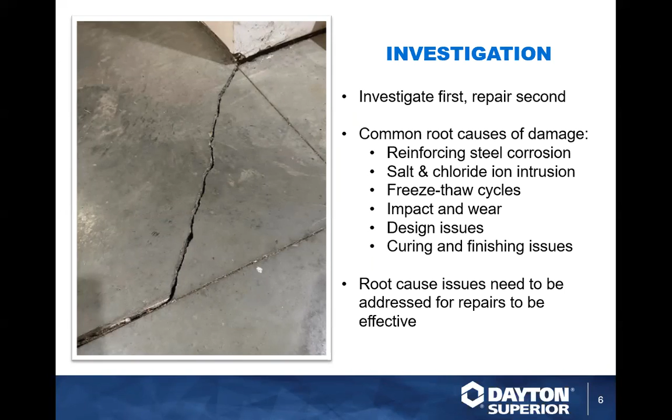But in any case, if the root cause of the damage is not addressed, the repairs are not going to be effective in the long term. So it's really important to have a full scale understanding of the problem so that you can address it in its totality. Repair mortars are specifically designed cementitious materials or epoxy based materials that are engineered for a purpose.

Some repair mortars are meant to take traffic. Some repair mortars are meant to be installed vertically and overhead. Some of them could be built up to 12 inches thick when they're extended with aggregate. Some of them are thin setting, ½ inch or less. They're all specifically engineered products, and picking out the right repair mortar for your job, outside of addressing the root cause and going through the steps of installing it correctly, is very key to having a successful repair job.

So basically, when you get into a repair job, make sure you're picking out the right material for it. Go through the tech data sheet, look at its limitations, look at its features, and you go from there. It's pretty easy to figure out what you're going to need for a job, given depth parameters, given the substrate, given the conditions. But measure twice, cut once. Material selection is very important in the world of repair mortars.

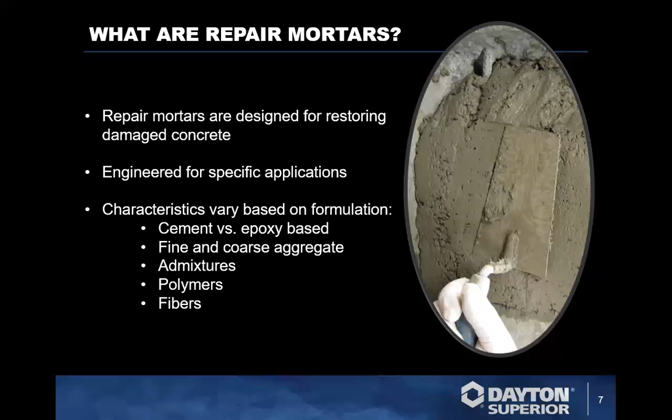Where is it going to be going? Is it going down flat? Is it going overhead? Does it need to be formed up and poured or pumped? These are the defining characteristics of repair mortars.

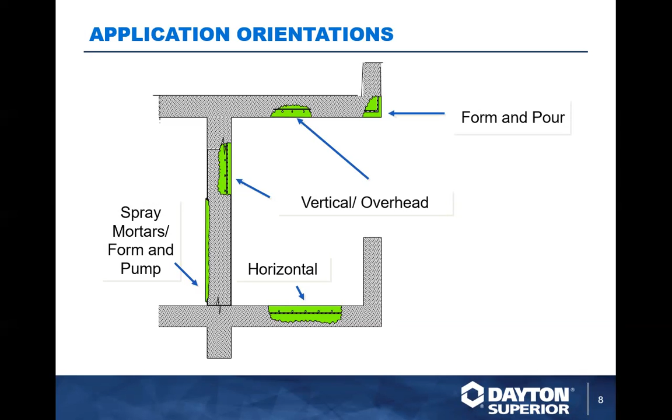So after we've addressed the initial cause of the damage, and we've started to figure out what kind of material we're going to need to use to repair it, we need to define the entire repair area. This stuff is all very spelled out in ACI documentation about how you need to lay out repairs so that the mortars stick and adhere and wear correctly. Basically, you're going to see damage at a certain spot and start there, but working out from the core of the damage using sounding techniques such as hammer sounding, impact echo and chain dragging is a great way to understand the whole repair.

How much material are we going to need? How much of this area are we going to need to caution tape off or danger tape off? How long is this going to take? How big of a crew are we going to need? You don't really know that until you start sounding out the area and preparing the area for repair. But audio techniques, hammer sounding, chain dragging, and these newfangled impact echo machines do a really good job of getting into the concrete, helping you figure out how far you need to get out from the middle of the damage with your repair.

And tell me the truth. Did you make up chain dragging? It sounds like something. It does. It sounds like a myth, but actually it's very common, especially on bridges. Okay. It's a common means to. I just thought maybe you want to be in the back, running around with the chains or something. Yeah, I mean, it sounds like fun, but it's really not. It's just noisy and heavy.

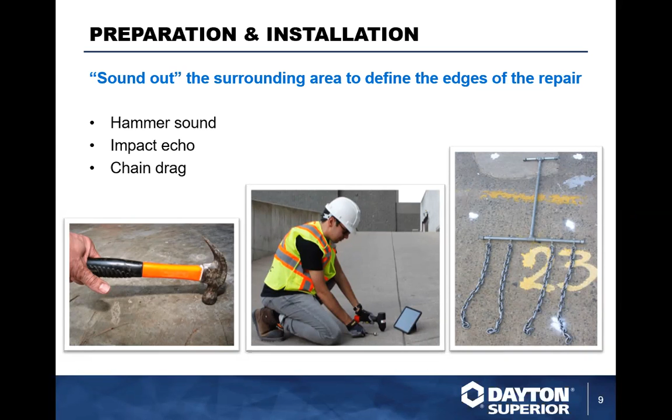Repair geometry is actually really important too. I think a lot of people who work in the field are just kind of used to doing things this way and don't really understand why. But having a defined edge to the repair using square or rectangular geometry is widely recognized best practice.

Using a saw or a grinding wheel to create these edges basically gives the repair mortar something to bind to. It creates a uniformity. It makes it easier to place. This is just how you should be laying out your repairs. Odd angles and strange patterns just tend to crack and delaminate.

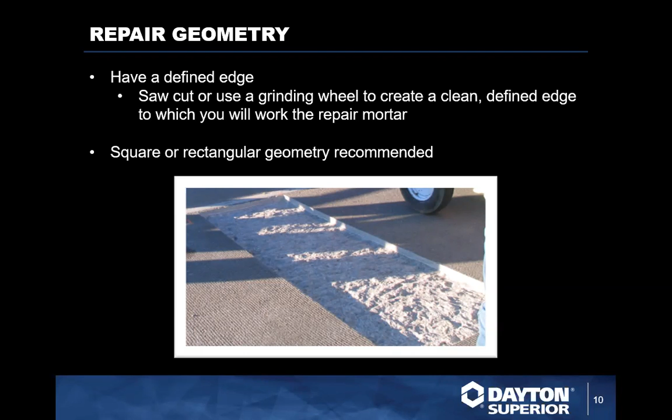And additionally, if you aren't going about square or rectangular geometry and sounding out the repair and going through these initial steps, a lot of times you can be using damaged concrete as your substrate. So this helps you make sure that the entire area you're repairing is uniform and that you aren't bonding repair mortar to any structurally unsound concrete, essentially. It's kind of a fail-safe mechanism.

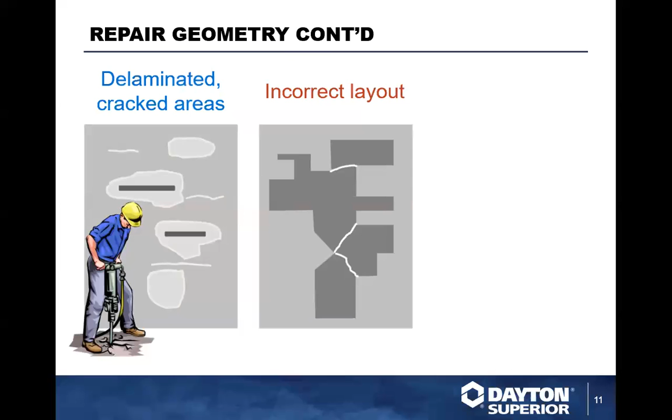This picture kind of spells it all out too. You have cracked areas and delaminated areas, and it's just not looking good in several areas. You could lay this out like the picture in the middle here, and it might seem like it's going to do a good job. You covered all the repair areas. But that's really not how you should be doing it. Squares, rectangles, it's easier to saw cut, it's easier to place, it's easier to work with, and it also helps you make sure that you aren't applying the material to anything that's structurally unsound.

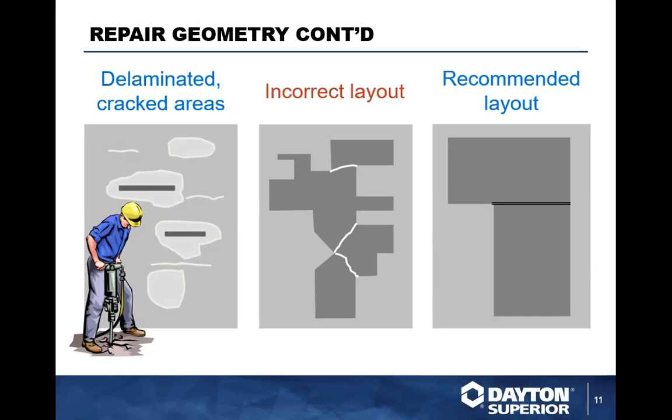First off, we got to clean the concrete. After we've saw cut all these edges and we got our geometry all set and good, get the dust out of there. Concrete, when you cut it out, creates dust. When you chip it, it creates dust. If you're hammer drilling, if you're jackhammering, too much dust. We don't want the dust on the surface. Clean the concrete. Oil, any kind of bond breakers, you don't want standing water in there. We'll talk about saturated surface dry in just a minute.

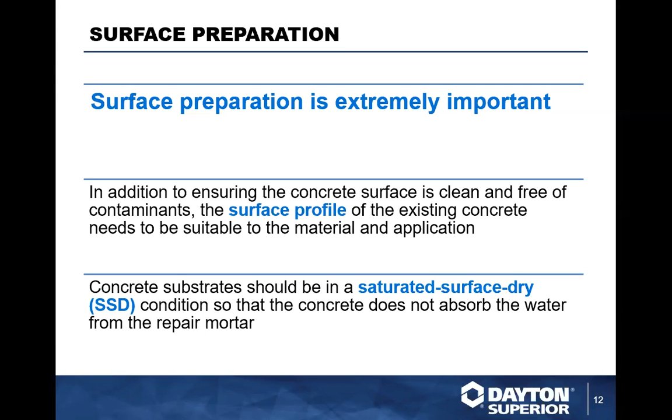But these conditions are extremely important, and if they're not really well attended to, you're going to have failure in your repair material, and you're going to be back there doing the same job twice. Most people who listen to concrete construction webinars don't like doing the same work twice, so highly recommended. Focus on the details before you start placing the material, and you'll love life. It'll be good.

Without this profile, the repair mortar cannot bite in. It does not bond well. Concrete does not bond well to really smooth surfaces, in layman's terms. Most of the time in your technical data sheets, there will be a recommendation on concrete surface profile.

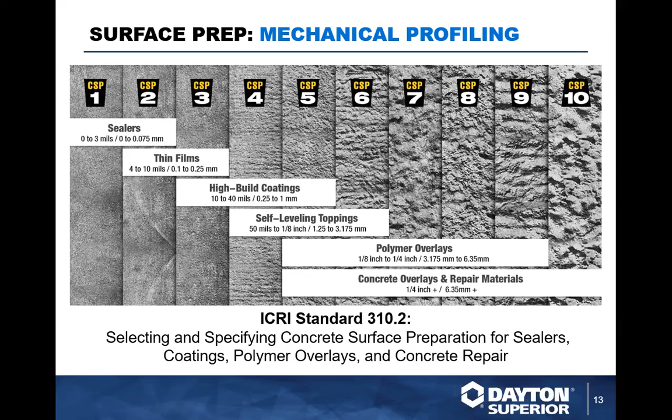Saturated surface dry is a condition of a porous solid where the permeable voids are filled with water and there's no water sitting on the surface. Basically, this is mumbo jumbo and big words for concrete sucks water. It's true though. If you have a concrete driveway and it's not sealed, go out and dump a bucket of water on it. It'll soak the water right up. There will be no water on the surface anymore.

When you mix up a repair mortar, it has water in it. So what concrete wants to do is suck the water out of the repair mortar mix and deprive the repair mortar of water, which is bad for the strength of the repair mortar. It robs the cement of its hydration. It doesn't cure properly. It chips out, it breaks, it cracks, common issues.

So the saturated surface dry process, basically, think about thirsty concrete. You give the concrete a drink before you fix the concrete. Otherwise, it's going to suck all the water out of the mix and you're going to have a bad repair job.

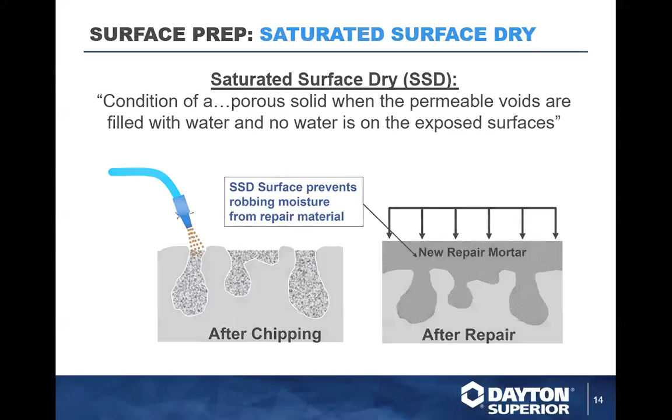Mixing tips: when you start mixing this stuff up, stop before you start and read the tech data sheet. Water dosage rates are very important. Make sure you're checking the latest technical data sheet and not just going off one you've had saved on your desktop or phone forever, because sometimes these products get reformulated and the water dosage rates change. Mixing time, also extremely important.

Some products you need to mix for 2 or 3 minutes. Grouts are sometimes 5 minutes. And that mixing time is crucial, as well as the uniformity of the mixing process. That's why we always recommend to add powder to liquid and not the other way around. If you have 50 pounds of powder in a bucket and you start adding water to it, the water is not going to be able to get to the bottom of the bucket.

So if you gradually add the powder into the water, you're making sure that all the powder gets hit with water. And if you continually mix it, as the technical data sheet describes, for the amount of time, you're going to see the powder gradually get hydrated and it will create a nice uniform mixture. You don't want any clumps. You don't want any lumps. You can't have any pockets of powder that have not been hit with water. That's just not going to work.

And if you're doing a small job, if you're using less than a full bag, pre-mix the material by shaking or rolling the bag. Don't be afraid to hurt the bag. The bag doesn't have feelings. Roll it around, toss it on the ground, get that cement and that polymer and that sand all homogenized. It needs to be homogeneous. Otherwise, you're going to have inconsistencies in the mix. You might get a lot of cement here and not enough over there if you're doing 2 small patching jobs with the same bag.

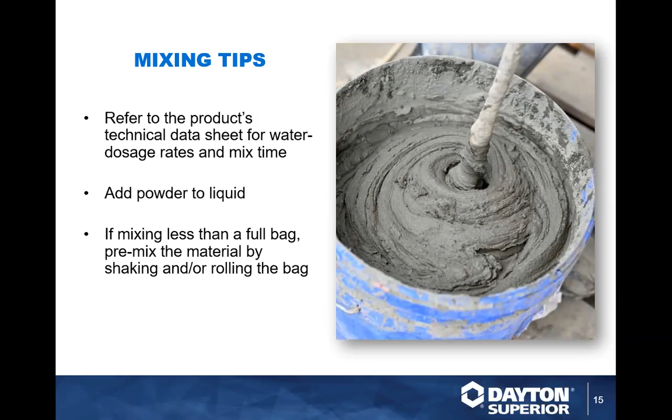Important detail stuff. Scrub coats. So when you paint, you use a primer. Scrub coat is like a primer for concrete. Basically, you mix up a little bit of the repair mortar with water and use a brush or a roller and get it onto the patch area. And basically, it serves as a primer.

All these repair mortars we're going to talk about today, I'm pretty sure all of them have polymer content in them. And putting the scrub coat onto the saturated surface dry concrete basically creates a gluey kind of bonding layer, if you want that picture. It really helps with bonding. It's super easy to do, and it makes sure that the patch is going to stick.

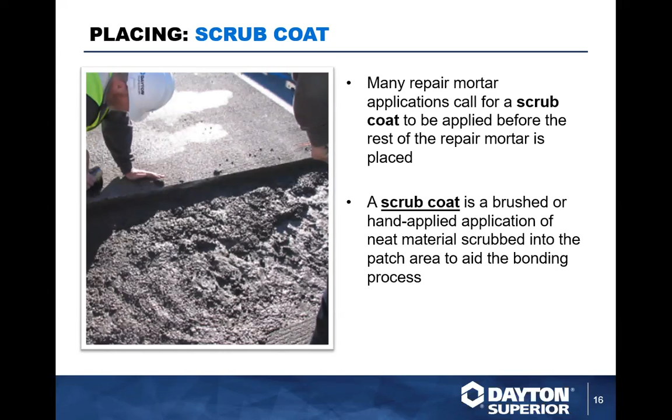After you place your patch, do not forget to cure. I really wish I knew how many grouting jobs and patching jobs exist that don't get cured. I don't know why people don't think about it, because when you place concrete, you cure the concrete. This is cement. It needs to be cured. ASTM C309 curing compound, it covers you. You can wet cure it. A lot of people for smaller installations will use like burlap or burlene, polyethylene sheeting, stuff like that.

I always recommend ASTM C309 curing compounds because A, we sell them, B, they're easy to get and they're readily available, and they're custom engineered for certain situations. You can use a dissipating resin in certain areas, you can use a cure and seal in certain areas, but yes, patches need cured, they're concrete, don't forget about curing them. So now we're going to get into some products.

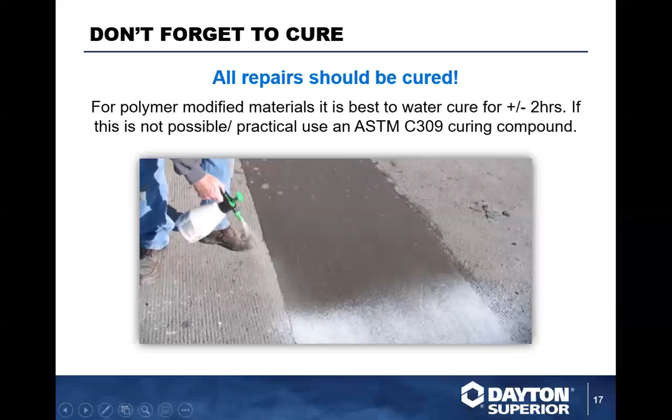HD50, very versatile product, very fast setting, high early strength gain, latex modified and fiber reinforced. When you see latex, you think sticky glue. Fiber reinforced, little tiny strands, literally fibers inside the mix of the bag. It helps with the tensile strength and compressive strength. It makes it stronger. When you see 1 hour strength, 2000 PSI, we're kicking, we're working here. The stuff sets up really fast. Most of our patch formulations are pretty fast setting formulations. We don't deal with a lot of extended set products.

We're by nature a commercial construction supplier. All of our products are formulated for turnaround time in industrial applications and DOT applications. People don't want to close the road for a week. They want to close the road for 2 days. So HD50 is a really great, strong, fast setting horizontal patch. Can be placed up to 6-inch deep when extended with pea gravel. It's very heavily specified by state DOTs, thanks to my friend Sarah Clark here. It's great for fast turnaround. It's a great product if you're looking to do some flat work and you need to get back on it really soon. HD50 is a great way to go about that.

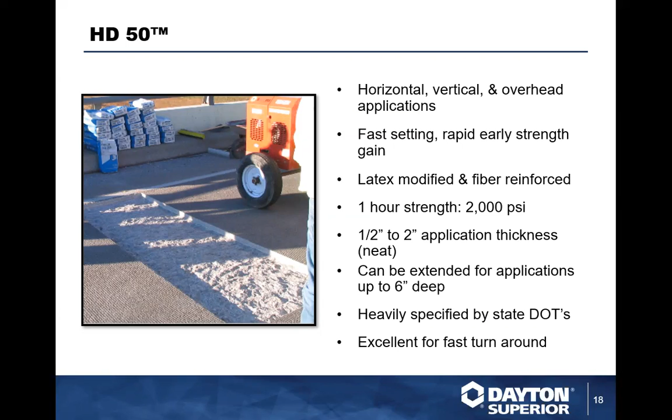We got 2 shout outs today, Sarah. Yeah, Sarah's an office favorite here. She's a great person.

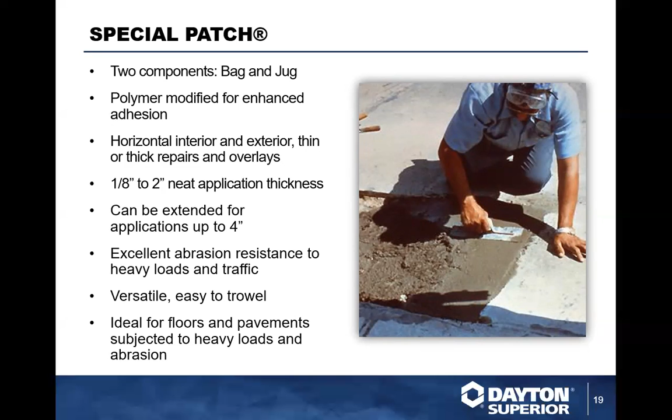Special patch is kind of an old school bag and jug system. The jug is polymer, liquid glue essentially. That makes this stuff nice and sticky. It's good for interior and exterior repairs. It can go all the way down to an 1/8 inch thin or up to 2 inches neat. Can be extended up to 4 inches with pea gravel. Bag and jug systems are really good for abrasion resistance, but special patch definitely fits the bill. Very versatile, easy to work with, good resistance to heavy traffic. So it's really good for floors, anywhere where it's going to see a lot of daily traffic. Special patch is a really good product and it really holds up well in those situations.

Polyfast FS is another high strength, fast setting horizontal repair mortar. It can also be used in vertical and overhead applications. It's single component, so you take that bag and jug system from special patch and get rid of the jug. Just add water. It's polymer modified though, so it's going to be sticky, hence how it can be used in vertical and overhead situations. I always gravitate toward products like this when I am making product recommendations because it's easy to work with. You don't have to worry about a bag and a jug. You don't have to worry about a whole lot. Just add water, mix it up, trowel it on.

It can be extended for repairs greater than 2 inches, 1/4 inch to 2 inches neat. You're not going to see a whole lot of feather edge products in this presentation, although we will get into a couple. Just generally speaking, when you're working with horizontal repairs and things that you're cutting out, you aren't really going to need to feather edge it anyway. Polyfast FS is going to do most of the depths you're going to need. It's versatile, so if you have to hit a horizontal spot and you have a vertical spot over there, you can use the same product. Some good value added there. Polyfast is a good mover and a good product.

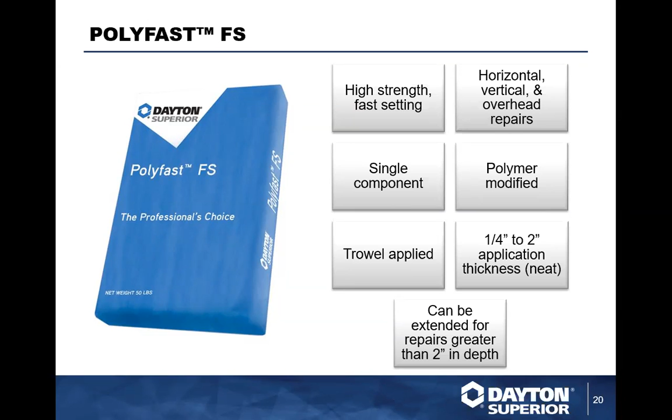DOT rapid repair. I think I'm catching a theme here. These are all fast setting formulations. DOT rapid repair. If there is ever anything in a name, this is a great name. Department of Transportation needs to fix things fast. It's heavy duty, it's polymer modified, it contains a corrosion inhibitor. Very important in DOT work. Exposed rebar corrosion is one of the leading killers of concrete. So having a powdered product that you can apply to an area where there is corroding rebar and it will inhibit that corrosion, that's good. We want that.

It's also super versatile. The extended applications go all the way up to 24 inches in certain circumstances. It can be applied neat from 1/2 inch to 2 inch. It can be field extended up to 8 inch. There's a pre-extended version. Very versatile, very, very crucial product for infrastructure projects. So if you're bidding any road repair kind of work and you need a fast setting patch, this is your dog.

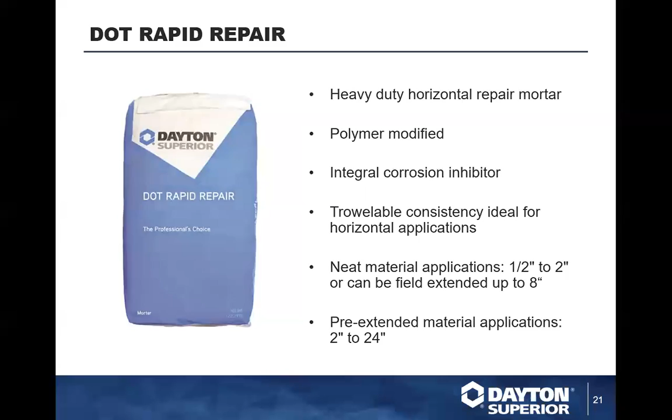Pave Patch 3000, similar, not the same. This can be formed and poured into vertical and overhead applications as well. Once again, talking about fast setting, it's so crucial in our industry that things turn around quickly. This nice flowable consistency though, it's easy to work with. It can take your normal traffic in 1 to 3 hours. 7-day compressive strength is 7,000 PSI.

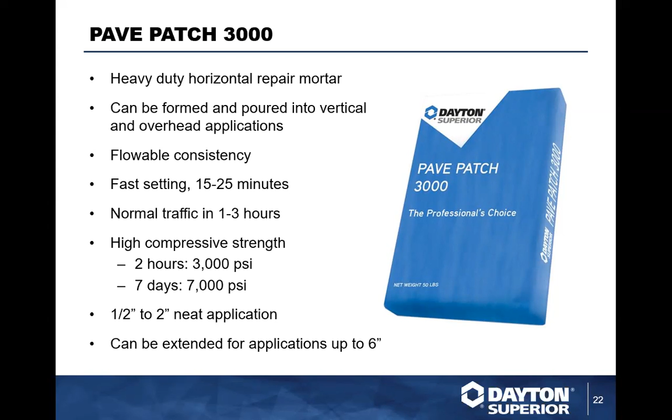That's hardcore stuff. 1/2 inch to 2 inch neat application, can be extended up to 6 inches. So it's versatile enough for most of your horizontal repair needs. Pave Patch 3000 is awesome. Once again though, if you're working with it in hot weather, you might want to use some cold water. This stuff sets up very fast and it's designed that way. So once again, road work, that's a good call.

These are kind of interesting products to be in a horizontal repair presentation, but I wanted to talk about them because rehabs are super common, and as we are revitalizing our cities, we're taking a lot of old industrial buildings and turning them into office buildings and turning them into housing. And a lot of times you have concrete floors that just don't look very good. So a self-leveling underlayment or a self-leveling topping would be a great option to go over these areas and provide a nice, new, smooth, clean surface.

Underlayments like LeveLayer and Econolevel are not intended to be a finished floor, but they will go in to provide a new level floor. So carpet can come in, you can put down ceramic or wood or Pergo or whatever you're working with.

I don't know if anybody calls it Pergo anymore. You just did. I did.

But anyway, these products are really nice and they're really important when you're doing rehabs. They help buildings get turned around and repurposed very quickly. One thing I like to add whenever I'm talking about self-leveling underlayments and toppings is they're not structural. So if you have cracks in the concrete, those need to be addressed with an epoxy prior to the application of the underlayment or the topping. Luckily, we have a whole line of epoxies, so we can help you with that too. I wanted to give these a shout out though, even though they're not really repair mortars as we normally think of them, because they do revitalize floors.

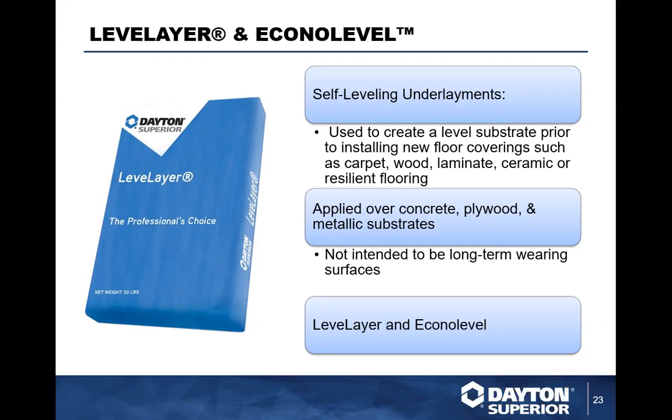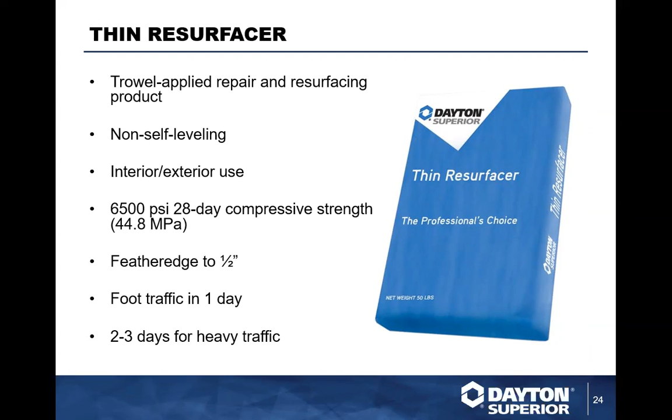Thin Resurfacer is an adjacent product to the underlayments, or I should say to Level Topping. This is a trowel applied topping product. I gotta say, if you're doing a big job and you need to resurface a large area, I probably wouldn't lean on this product because it's so sticky. It's just so tenacious. Placing this stuff in large areas is not fun.

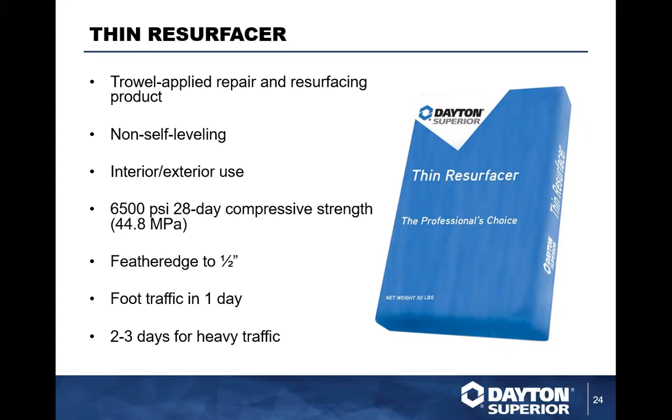But for feather edge to half inch, thin repairs, small areas, if you have a self-leveling kind of application, but you have one area that is particularly troublesome and you need to work with a trowel, you can't have product running away from you, Thin Resurfacer is really good for that. It's kind of a niche thing, but if you have a small area that needs resurfaced and needs to take traffic, Thin Resurfacer is awesome for that.

Now we're going to get into Level Topping. I like Level Topping a lot. Let's say you have a patio and it's just seen better days. It's in fine shape, it's not hopeless, but it just doesn't look very good anymore. That's what Level Topping is for. It's great for resurfacing aesthetically non-pleasing concrete. There's some nice finishing options that can be done with Level Topping as well. So if you're looking for something kind of architectural and cool looking, you can do that too.

If you ever have any questions about the limitations or how far you can go with Level Topping, feel free to reach out to me and my team and we'll get you a bunch of information. I really love Level Topping though.

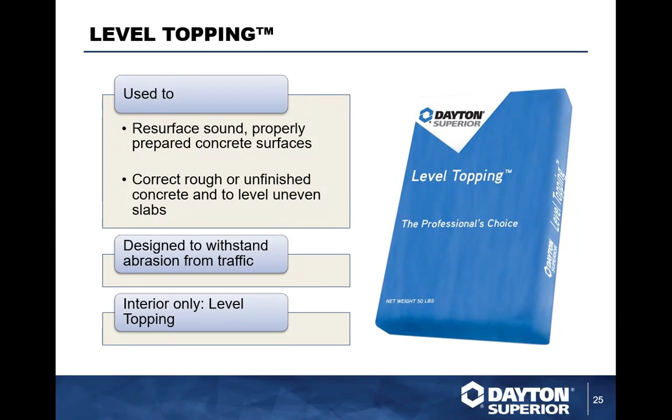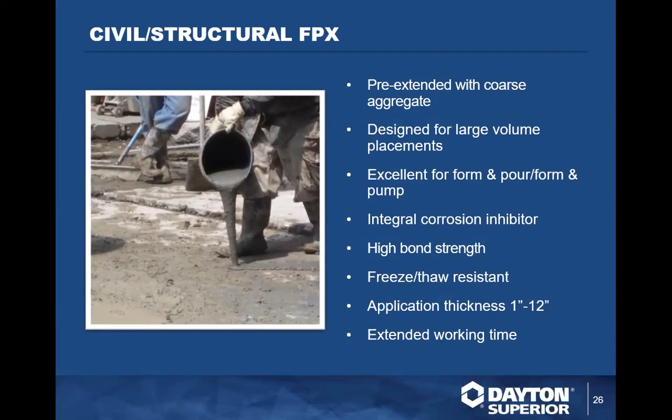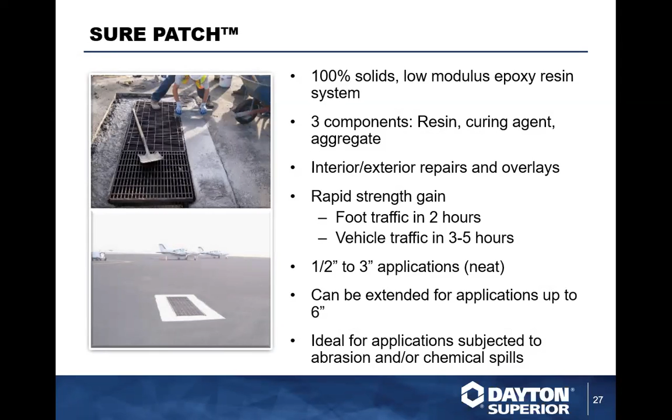I always like these two pictures here on the left. You can see it's literally on an aircraft runway. This stuff is designed to be mega hardcore. It's really good with chemical spills and abrasion. Sure Patch is awesome. Maybe not as awesome as Rapid Resin Repair though.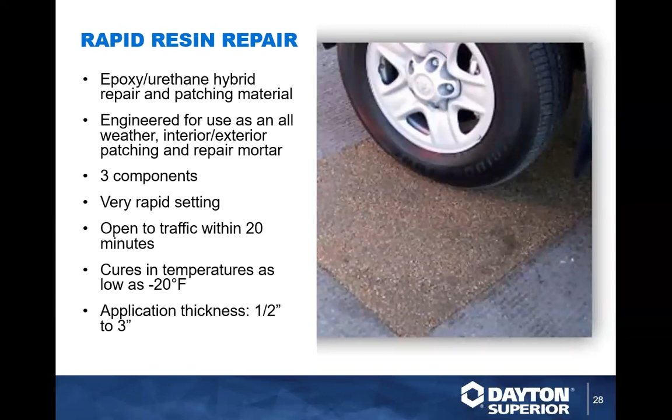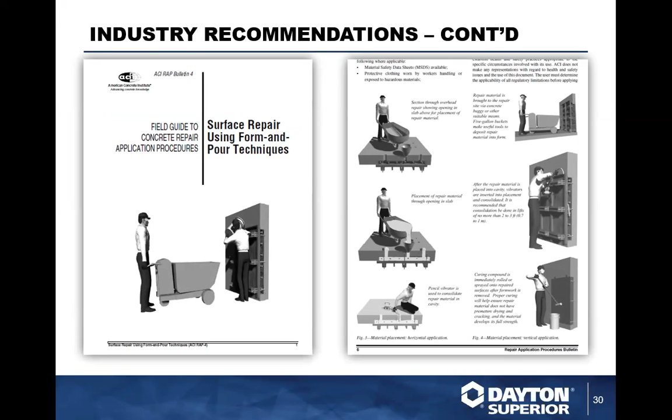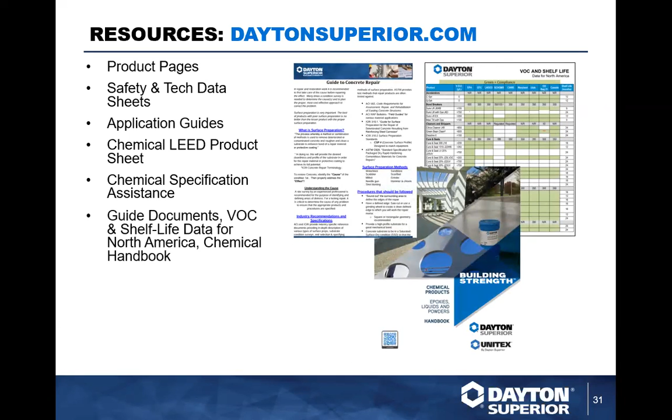So we got a couple questions real quick here. If anybody else has any questions, then go ahead and put that in. Do you make any white repair products? Not right now. I don't think so. No. We've had some formulations in the past, but we don't have any on the market currently.

And then the second question is related to SurePatch, 1/2 inch to 3 inch applications. When you say the product can be extended, does that mean adding rock and sand? It means adding 3/8 inch washed pea gravel specifically. If you ever have questions about that, absolutely feel free to reach out. There's a lot of information online. Extending repair mortars, you have to use clean pre-saturated stone. It's not as simple as just adding rock, but pea gravel is the answer. It's great. He said thank you. You're welcome. Okay, anybody else?